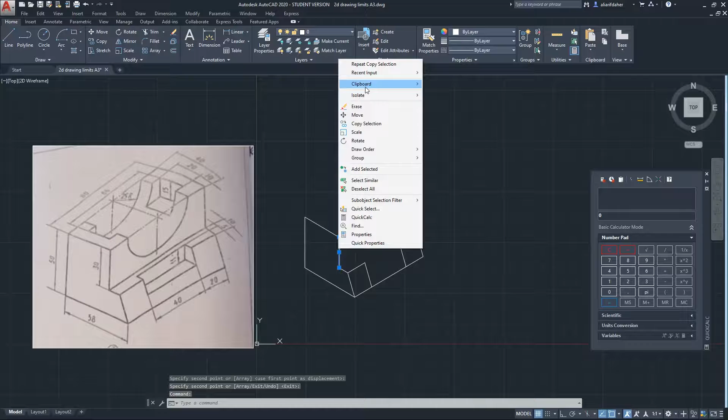Using copies is always a good idea, because this will complete the work faster for you.

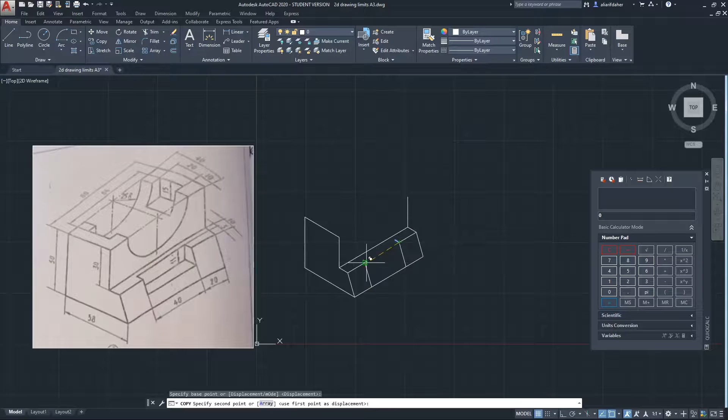I will come up by 5. And the angle, of course, the negative for 30 is 150. That's how it is in that kind of workspace. If you put the angle to 180, and from the other side 180.

If you were working in 360 angles, it will be a bit different. I prefer that one because it's easy, and that's how I'm used to.

Come down by 11, 90 angles, and make a line by 30 angles. After I complete this side, I will copy this one now. Then to clean this one up, I will use trim to clean up everything.

If you click on trim, you just press enter on the screen. After that you click on the points and the sides that you want to delete. If you go back to my older videos, you will find me explaining everything about trim and tools.

So for making the isometric circle, I need to describe the size of this, because the circle is 25 radius, so I will make for every side a 25 as a square. Then I will copy this to complete the square, and after I copy everyone and finish them, I will delete the middle of the square, because I don't need those lines, they will mess the work.

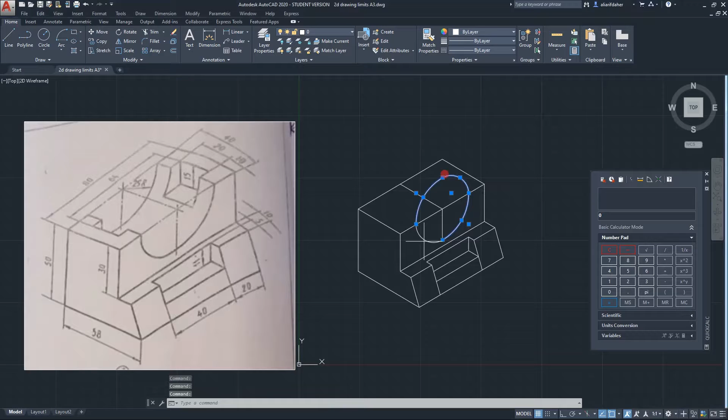I will copy this one to the other side. I will select everything to copy it, and I will choose the middle point to make a perfect something like array circles, and that's it.

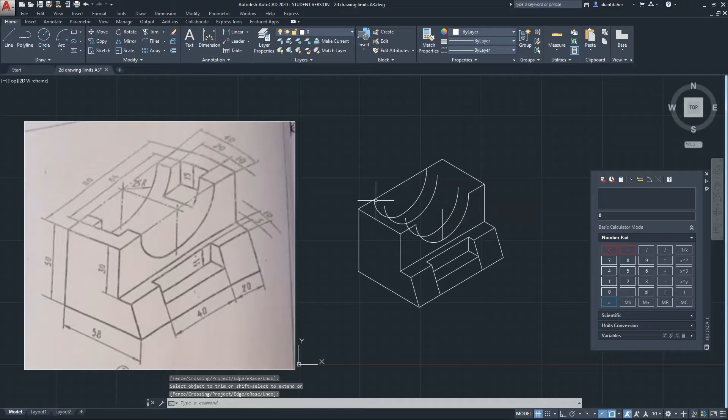I will speed up the video to just clean and add some points.

And this is the last steps. I will come down and copy it. I will connect them.

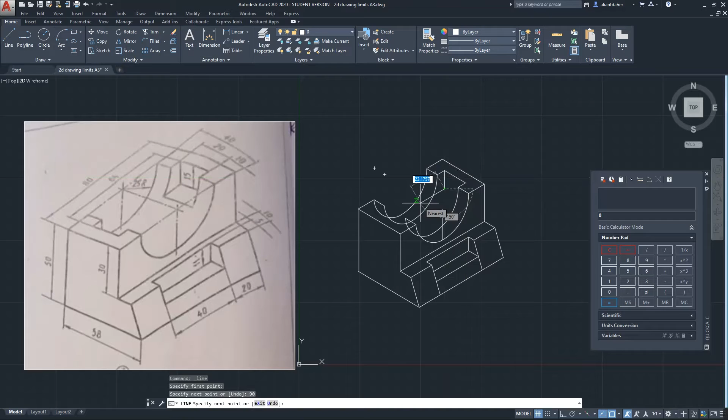Then I will come down by 15, the angle 90. Then I will come to the negative side 150 by 20 or 15, just cross the line here because I will trim it later, and I will connect by 30 angle.

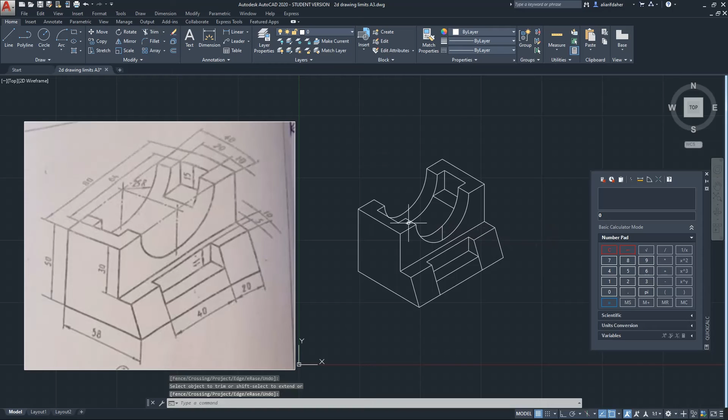Then I will copy this one to here, and after copying I will speed up the video now. So I will just clean up the end points because the whole drawing is ending now.

And after you finish everything, just take a look to make sure everything is perfect. And this video ends here.